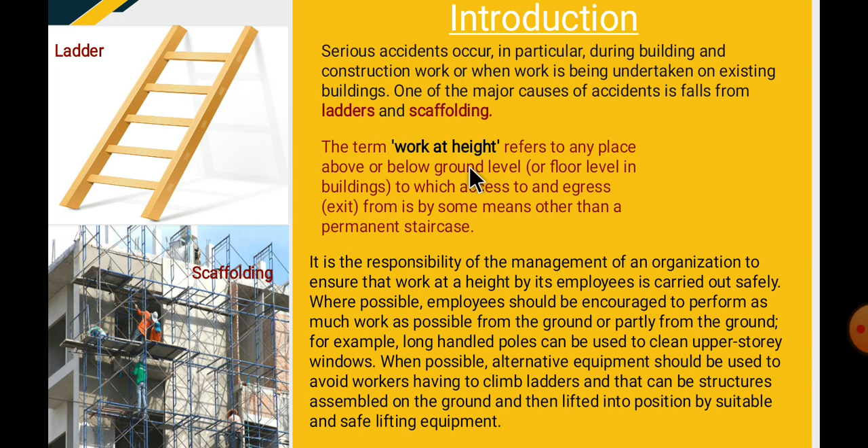Now let me revisit gutter cleaning. Recall that in the previous slide we said work at height refers to any place above or below ground level. So when undertaking an activity such as gutter cleaning, that means you are below ground level. If you don't take care, you can fall into the gutter, causing harm to yourself.

Affixing posters, we have said it. Doing minor roof work, shelf stacking in shop or store, window cleaning, loading and unloading vehicles, and even - take note of this - even during simple actions such as changing a light bulb or a fluorescent strip. These are some of the common activities that make us vulnerable to falling from heights, so kindly take note of that.

Note also that workers in all industries might be exposed to risks. Let me stress this: workers in all industries might be exposed to risks. This tells us it is not only large companies whose workers are prone to hazards associated with working at height. Irrespective of the kind of industry you find yourself in, either small or large, work at height needs to be done with extra vigilance so you can put in necessary measures to prevent falls.

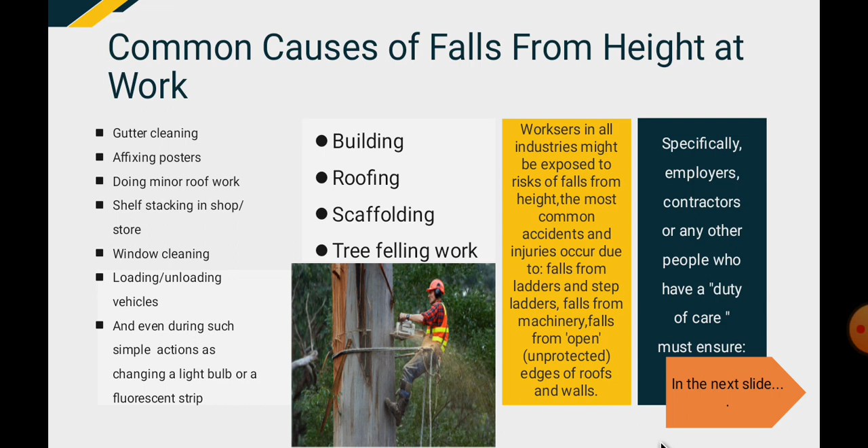Let us consider in the next slide how we can do that. First, that all work at height is planned and organized. So any activity at height, even before it is undertaken, management in charge of safety must ensure that it is well planned and organized. You need to also plan for the workers as well.

When you plan, it helps you get to know the risks associated. In the course of planning, you will be able to identify the risks associated with the activity to be done, in order to undertake certain measures or actions which will safeguard these workers. And again, that the people involved in work at height are trained and competent to perform the task.

Whenever work at height is to be done, it is not just anybody at all. Some workers might have the theoretical knowledge and understanding, but practically they need to be trained. The fact that they theoretically know what is to be done and what is not to be done doesn't mean he or she is specialized or experienced. You need to take time, if possible, train and ensure that they are competent.

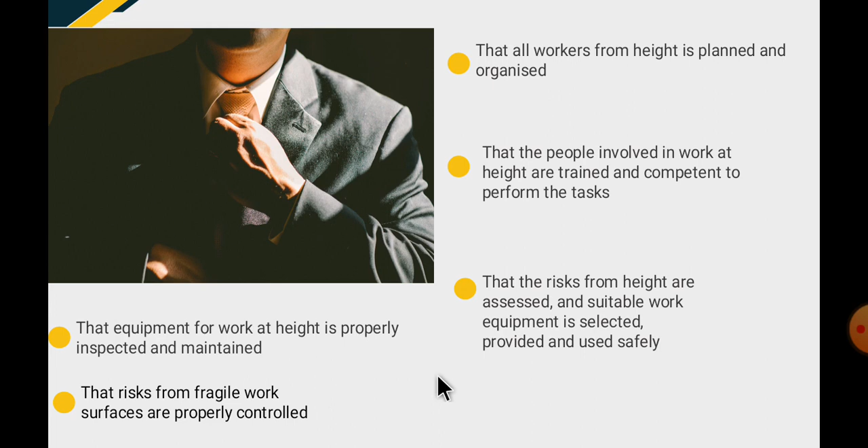Now, it is advisable that in all our dealings, we prevent working at height as far as we can and as necessary. But when work at height cannot be avoided or prevented by hook or crook, and we need to work above or below ground to undertake our activities, what should we do?

A full risk assessment must be undertaken during the planning process before work commences, and every effort should be made to prevent falls. This tells you that in health and safety, risk assessment is very necessary. Risk assessment is not done just once, and then you are off, or done today and then again next year. Risk assessment needs to be done any time that work is to be undertaken or job functions fulfilled. It is very, very necessary.

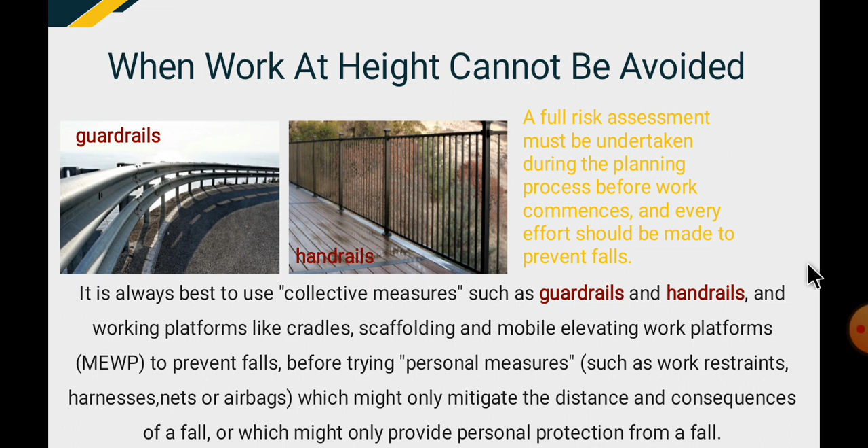Now, let us consider a ladder, since it is a common material that we use. In this and the next slide, we are going to consider how to position them, what to do, and what not to do, so far as the use of ladders in working at height is concerned. Ladders are the most common pieces of equipment used for climbing above ground or floor level. This is very true, and I'm sure you've done the same. With the aid of this lesson, you will know what to do before use.

Before use for climbing, a ladder should be positioned so that, A, the bottom of it will not slip outwards - let me stress that, the bottom must not slip outwards. This means the ground where we are positioning the ladder also needs to be assessed; you must ensure it is not slippery. And B, that it is at an angle of 75 degrees, called the 1 to 4 rule - that is, 1 unit out for every 4 units up. Kindly take note of that.

Now, if you are to stand and work, you should at least leave 3 rungs above. So if I am to work, I am to stand here, I shouldn't come here. Why? Because if you are working standing at this place, you are prone to fall from height. If you don't take care and the ground is not firmly established, you will fall. So make sure that you do not work off the top 3 rungs. Those are to provide a handhold in case of anything. In the next slide you are going to see an example, so don't worry.

And again, use the ladder for light work only. Do not attempt to carry heavy items or long lengths of material up the ladder. Carry light tools in a shoulder bag or in a holster attached to a belt, so that both hands are free to hold the ladder. Nothing at all should prevent you from firmly gripping the ladder whenever you are climbing. Do not overreach whilst climbing or working from the ladder.

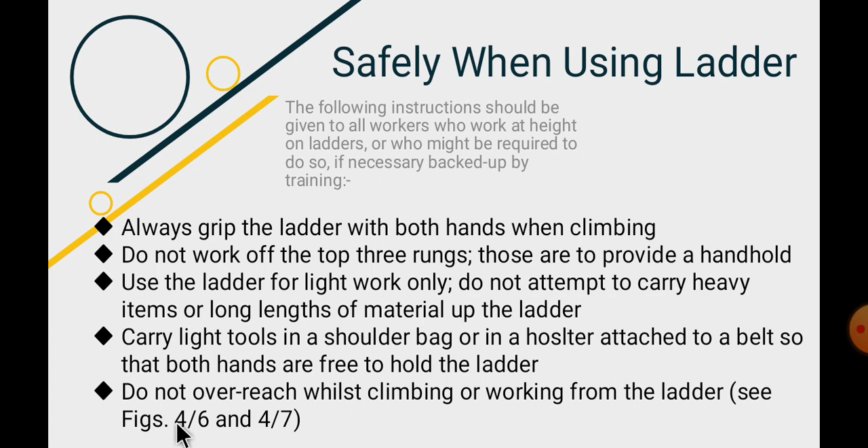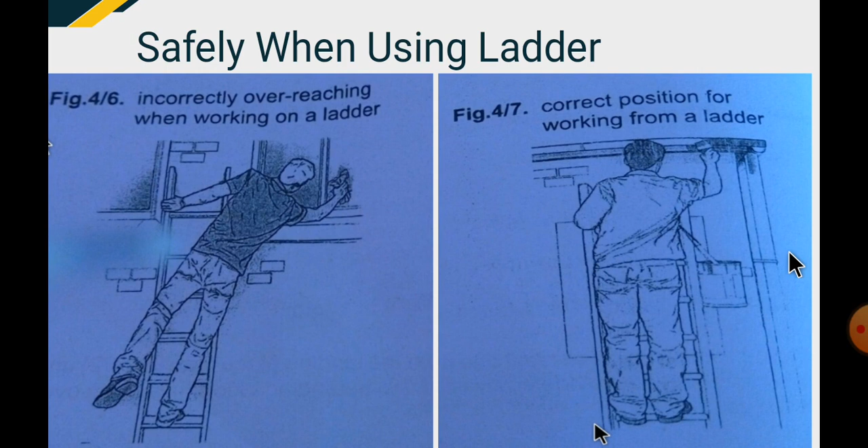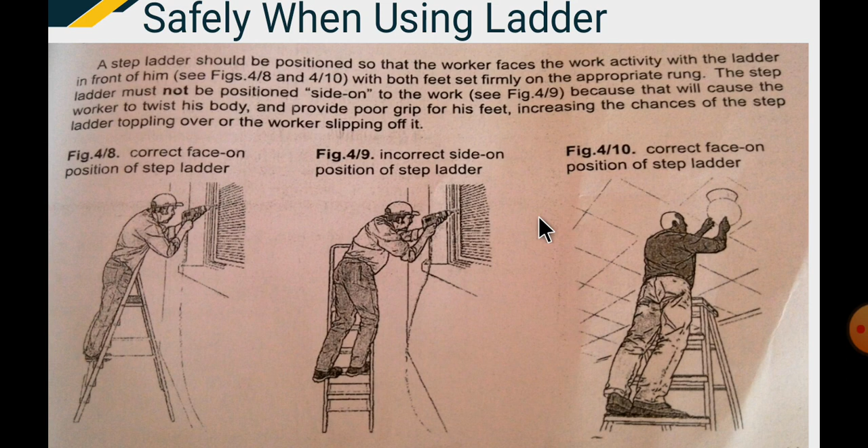Let's move on to the next slide. Now, all these slides, including the previous slides, are self-explanatory. So along the line, you can also just pause the video and then take time to read through the content. It is provided for you so that you can fully understand everything.

Now, let us also consider MEWP. MEWP, that is mobile elevating work platforms. It is always important to select the right MEWP. You have bypassed the ladders and so on. It is always important to select the right MEWP, that is mobile elevating work platform, for the job to be performed.

There is a wide range of MEWPs available. Some of them are designed for use inside buildings, while others are designed for use outdoors. Yes, so you need to know which one to use, either you are using it indoors or outdoors. And let us consider these pictorial examples over here. This is an example of a mobile elevating work platform. The controller here is controlling everything. There's an example of it.

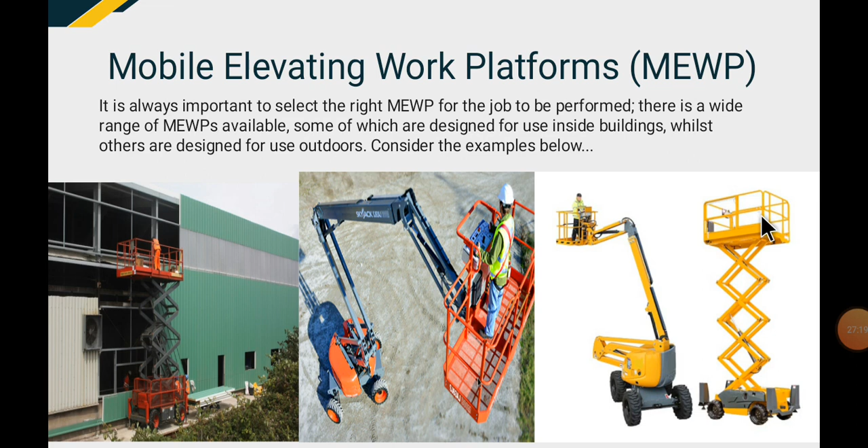Now, let us come to roof work. It also forms part of work that is actually done at height. Roof work. Now, accidents are common when work is performed at height on roofs, whether on new constructions or during the maintenance or repair of existing roofs. Not only are the workers themselves at risk of injury, but people passing by or underneath the work are also at risk of injury and even death.

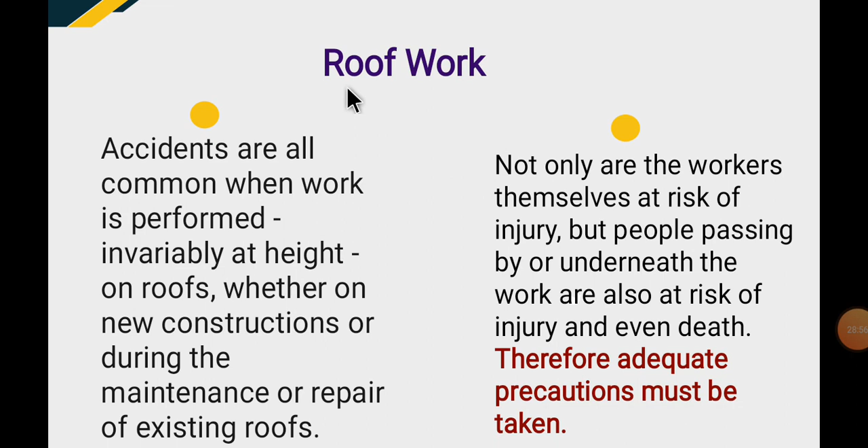Therefore, when certain precautions as well as certain measures are put in place, even you the worker, me as a supervisor, if safety measures and safety precautions are put in place, I become confident. There is nothing like fear or panic. There is nothing like that at all, and I efficiently and wholeheartedly put up my maximum best in ensuring that the right thing is done.

Thank you very much for your attention, and let us meet again on our next topic on Module 4, that is building and construction. Specifically, whenever we are undertaking building and construction work, there are certain safety measures and precautions that we need to undertake so far as it involves work at height.

Kindly forget that there is anything at all like only theoretical knowledge. No, forget about that one. Even if you have the theoretical knowledge, practically as a safety personnel, you need to train all your workers on how to safely use work equipment and ensure safety, because you have a duty of care. Thank you very, very much.